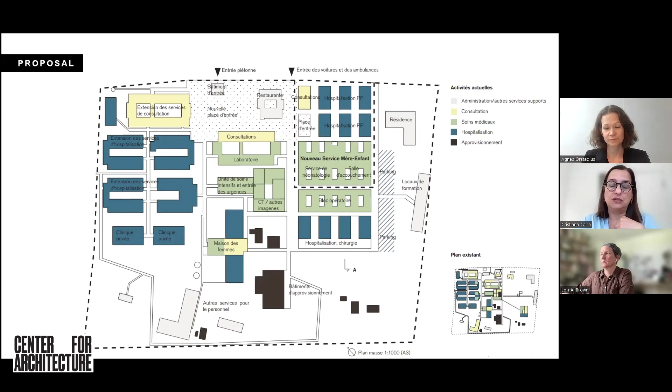And the more critical functions of the hospital are located in what you see in the green color in the center of the site, well connected to the emergency entrance.

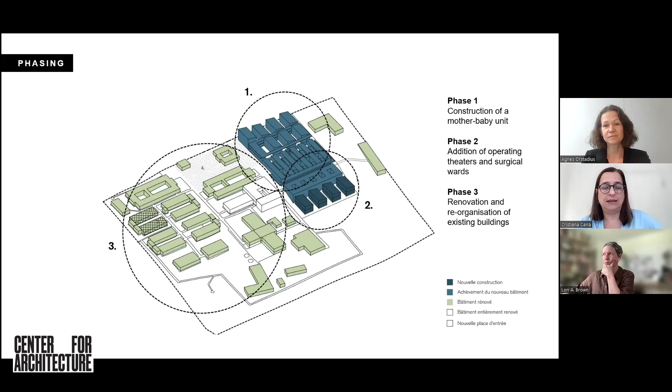The phasing is split into three parts. The first phase will be the development of the new mother and baby unit, which is number one. In the second step, a new operating theaters unit, located in the area marked number two. And as the third step, there will be the opportunity to renovate the existing buildings at the site.

So when it comes to the mother and baby unit, it is going to be the first phase of the development of the master plan, and the feasibility study and the concept design are based on a scientific, patient-centered, and holistic care philosophy.

The idea of Panzi is to develop a model for other maternity and neonatal care facilities in similar contexts, both in the Democratic Republic of Congo, Africa, and the rest of the world.

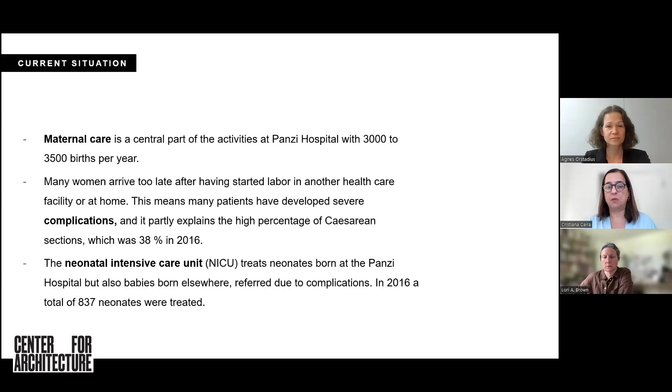The current situation is that maternal care and neonatal care are very important parts of Panzi Hospital's services, but many women arrive too late after having started labor in another facility, or unfortunately many at home. Some have developed severe complications, and the number of cesarean sections is extremely high. The same occurs for babies, many of whom are born elsewhere or at Panzi with complications and are then brought into Panzi Hospital.

The current situation is severe. There is a lack of space in the delivery unit and overcrowded postnatal wards. The delivery rooms are not appropriate for personal integrity and privacy. There is no opportunity for co-care of mother and baby, and no opportunity for the mother to stay close to their baby in the NICU department. It's very difficult for family members to stay close to mother and child.

The distances between the NICU, the delivery unit, and the operating theaters are big, which is quite difficult when it comes to patient safety. Sanitation is insufficient, and access to water and electricity is not secure. All of these factors create substandard work conditions for staff, and do not enable staff to work and deliver optimal care according to existing scientific evidence and the way Panzi Hospital actually wants to work with patients.

So what we did was work with evidence-based design as a process. I usually take this definition by Hamilton as most relevant for our work, since we worked with a process that relied on current best evidence from research and best practice, but was also very closely connected to the contextual needs of the users through design dialogues.

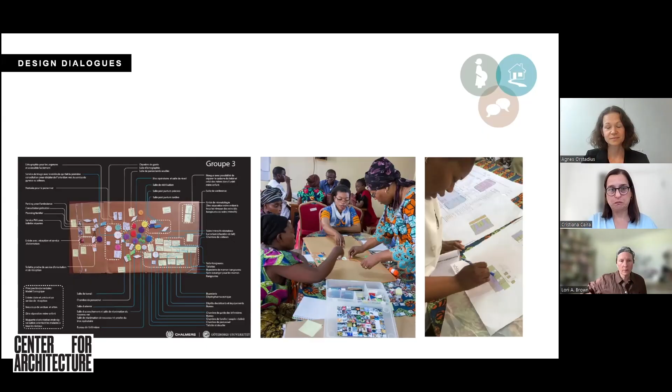The health promoting architecture principles are based on literature and scientific evidence, but we also had workshops on this specific topic to understand and quality-proof whether these principles are applicable and still coherent with the culture of the community and traditions.

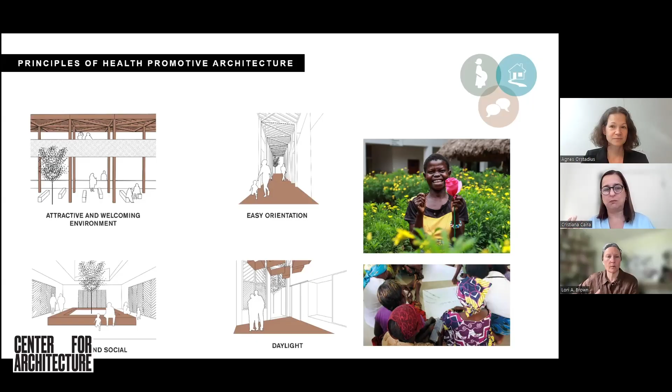We talked quite a lot about the attractivity of architecture and what it means: an attractive, welcoming hospital, easy orientation, the gradation between private and social spaces, and access to daylight.

We also worked with the local engineers and architects currently designing and working at Panzi to understand the quantity of materials, the access to building materials, and the building techniques to make a project that is really anchored to the site.

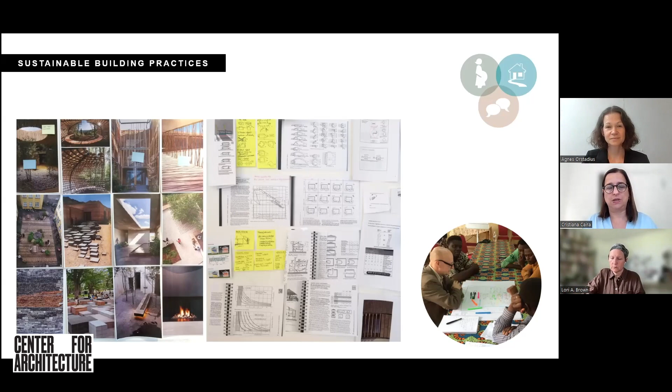Working on the core principles of the project, the main goals have been to reduce maternal and neonatal mortality and morbidity, creating optimal flows in short distances, the possibility to do cesarean sections in the delivery unit, and making the emergency flows reach directly to the delivery and neonatal unit.

To secure personal integrity and safety and work for zero separation of mother and child, we put the delivery unit and the NICU in direct proximity, also enabling co-care of mother and child and small wards with patient rooms for one to two mothers.

We also support or enable the continuous presence of a non-professional person, like the father, a family member, or a doula. This again impacted the brief significantly, creating space for companions in all patient rooms, family areas within the unit, and overnight space for relatives and supportive persons.

Working with a health promotive care environment, we aimed at creating a welcoming and attractive environment with access to daylight, views of nature, good indoor comfort in terms of temperature, ventilation and humidity control, noise-reducing finishes, easy wayfinding, and of course good, reliable technical systems.

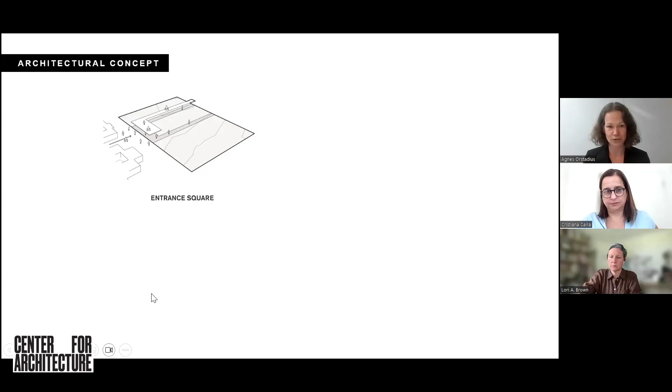And around these main streets, so to say, the program was organized so that all of the functions that needed these short distances and close connections were located on one entrance floor, with less urgent functions on the upper and the souterrain floors.

And within this structure, we worked with different sizes of atriums that were proportional to the heights of the buildings around them, to bring in greenery and daylight into this fairly compact structure.

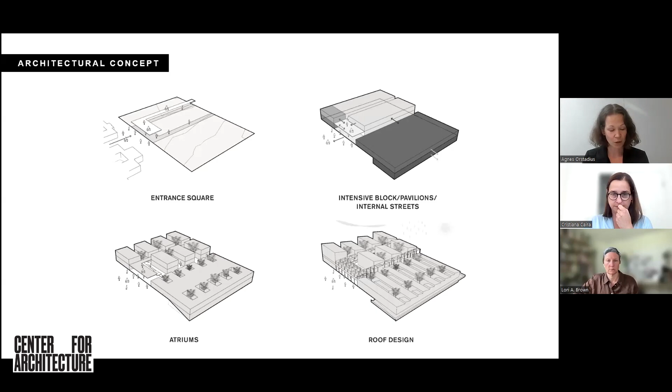We also worked with the roof shapes, optimizing them to the prevailing wind direction, enabling collection of rainwater and supporting natural ventilation.

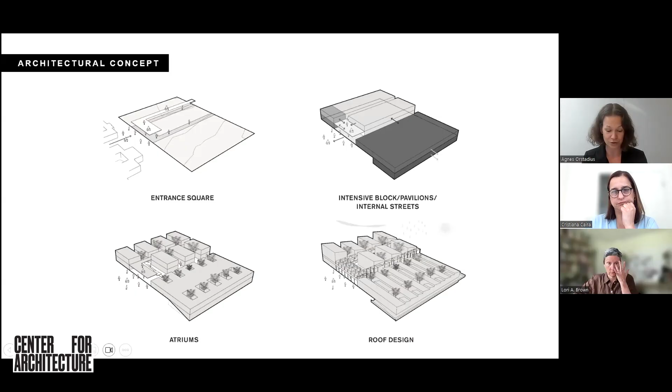And the public squares and the public streets were given this distinctive timber structure roof to further ease orientation throughout the structure.

So looking at the site plan, you can see the main entrance to the hospital towards the top of the plan, and the new mother and baby unit in the east.

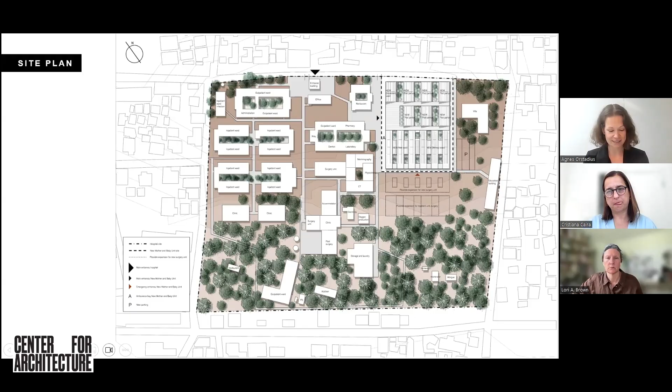This entrance square of the new mother and baby unit is oriented towards the main entrance. And you can see that we've densified the site rather than creating an expansive footprint and losing greenery.

Delving into the floor plans, if we start at the entrance floor, by the entrance arrow, number 1 is the large covered entrance square.

And the building closest to it, number 2, is the most outward facing part of the program. It's the consultation part, the antenatal outpatient department with consultation rooms, oriented towards the rest of the hospital and the entrance.

And leading off of this entrance square are the two streets, where the upper one leads through a series of postpartum pavilions in 2 floors, where healthy women and babies recuperate after the birth has taken place.

And the lower corridor leads to the neonatal unit on the left, and the delivery unit on the lower right.

And the neonatal unit contains cubicles for treating newborns, but crucially, it also contains this space for the mothers, which has been lacking, so that they can always stay close to their baby being treated.

And the delivery unit on the lower right contains 10 delivery rooms and also 2 operating theaters for cesarean sections, which, as Christiana mentioned, is a very common procedure.

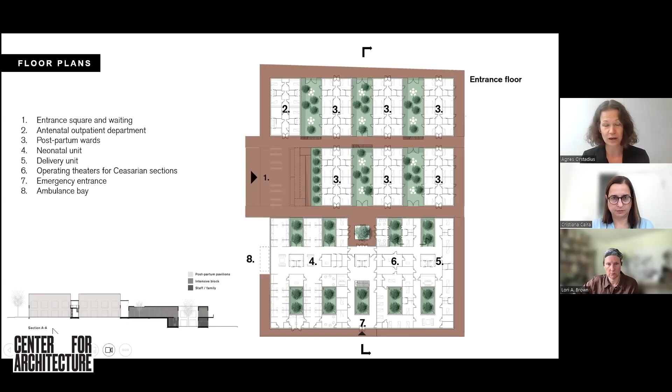And to the bottom, leading directly into these units, you have the emergency entrance, which is also easily reached from the ambulance bay on the left, coming off of the main entrance.

Moving away from the entrance floor, we see the upper levels of the postpartum pavilions. And located on this floor are also spacious classrooms, which we found a need for also for the rest of the hospital.

And above the entrance square, accessible by a ramp, we have a kitchen area for relatives and patients.

One crucial difference from designing this program in Scandinavia is the increase of presence from relatives of the patients, who accompany the patients on longer stays to support them and cook for them and so on, since no central cooking is provided at the hospital.

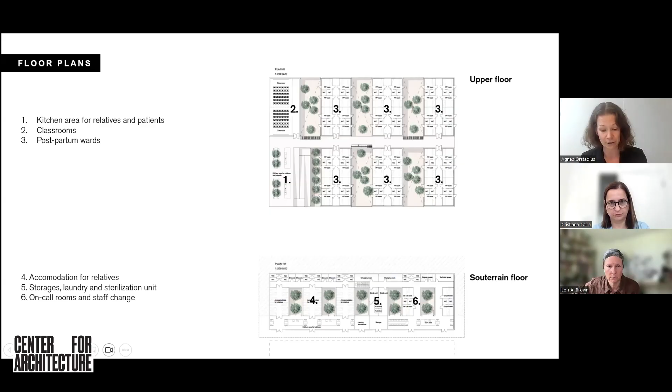Then on the floor below the entrance floor, we have placed accommodation for these relatives, support functions such as storage, laundry, and sterilization units, and also staff units.

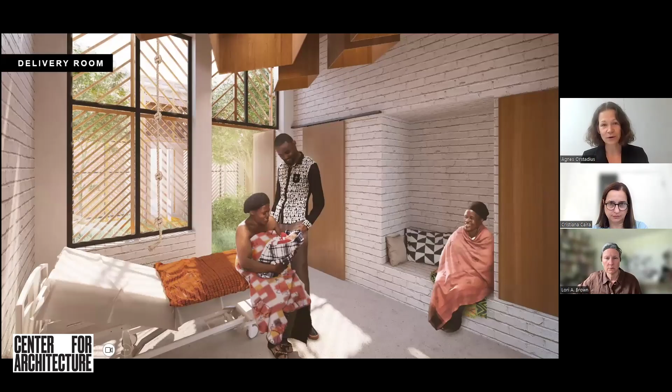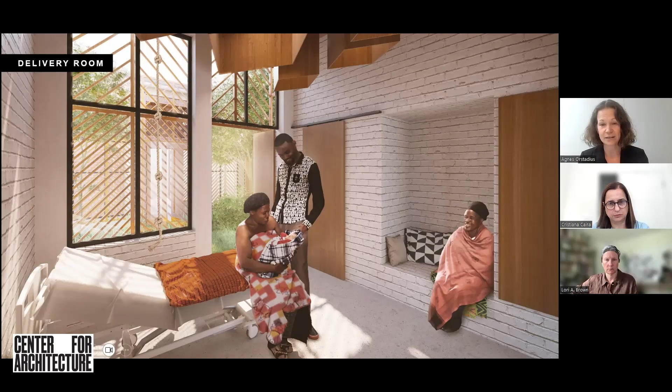This is an image from inside one of the delivery rooms, which faces onto an atrium, bringing in plenty of daylight and views of greenery, and which provides ample space for the mother, but also space for the supporting relative and the mother's companion, in a dedicated niche for sitting or sleeping. You can also see the door to the bathroom, which is shared between 2 delivery rooms.

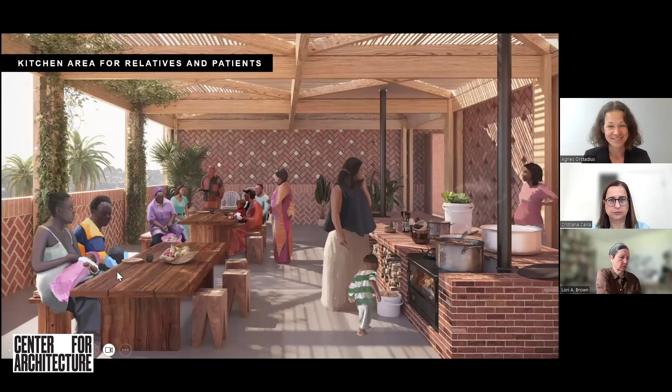And here you see the kitchen area for the relatives and patients above the entrance square, with the space and facilities for cooking and space to spend time with your family and your supporting relatives.

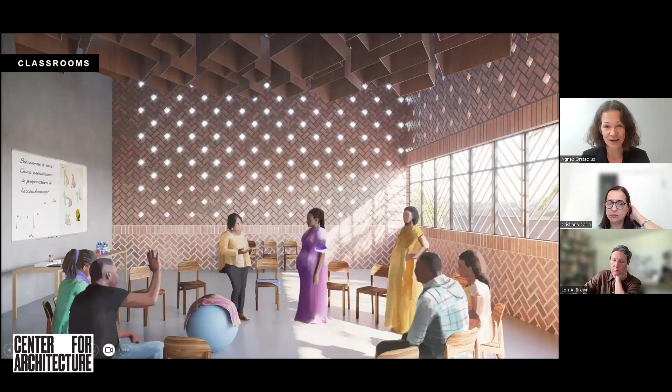And this is a view from inside one of the classrooms, where you have space for learning activities, both for the becoming mothers, but also for other needs within the hospital.

And the architectural intention of the project was to create a building that has a distinct identity in the materiality, but also one that breaks down the scale to be welcoming and approachable.

And there were several reasons for keeping the structure quite low, even though we wanted to densify the site and minimize the footprint. One is to let in as much natural ventilation and daylight as possible, and the other was to not rely too much on mechanical technology for vertical movement, such as elevators, so that all of the building would be accessible through ramps.

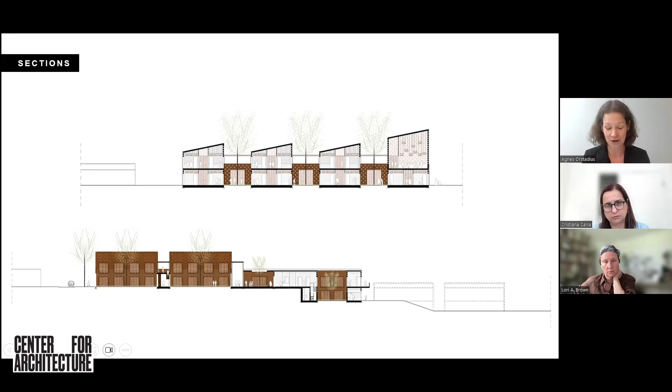And as a foundation for the design work, in choosing which architectural strategies to work with, we did a fairly thorough study of the local climate.

So this combination provided suitable conditions for using both the strategy of natural ventilation, but also passive solar heating with materials of high density that collect heat during the sun and then release it during the night.

And in addition to this climate research and mapping, we also tested our designs with simulations, tweaking the form to optimize for wind and orientation.

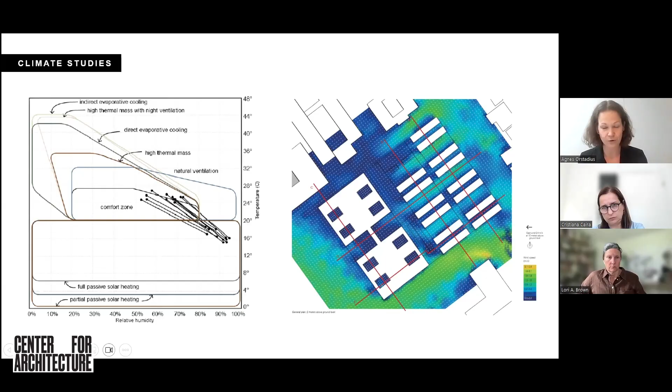So this is how these architectural strategies turned out in practice with these pitched roofs doing a lot of the work. As we mentioned, water can be a scarce resource, and so we devised a rain collecting system from these pitched roofs.

We also used heavier materials like brick to store heat during the day, and the pitched roof also helps ease natural ventilation through the building, creating a pressure difference on both sides of the building, which makes the dependency on mechanical ventilation much lower.

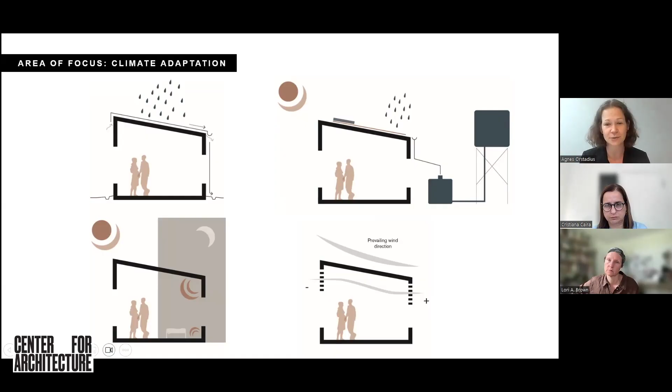We also did a lot of research on resource efficiency and tried to use local materials and local building techniques to the greatest extent possible. We used a lot of bricks, which are produced locally, and timber, which is also found nearby, so to speak.

We tried to minimize the use of concrete and steel because that has to be imported, and we also minimized the use of ceramic tile. So we let the material palette be very influenced by materials that are already commonly used in the region.

And we also worked a lot to future-proof the building. The entire floor plan is based on a very tested grid that has proved to be adaptable towards future needs, so that should you need to remodel the hospital in the future, hopefully the need for demolition is minimized, and the structure can be reused.

We also looked at earthquake resistance using local building techniques to stiffen the buildings and create even loads and a robust structure against earthquakes.

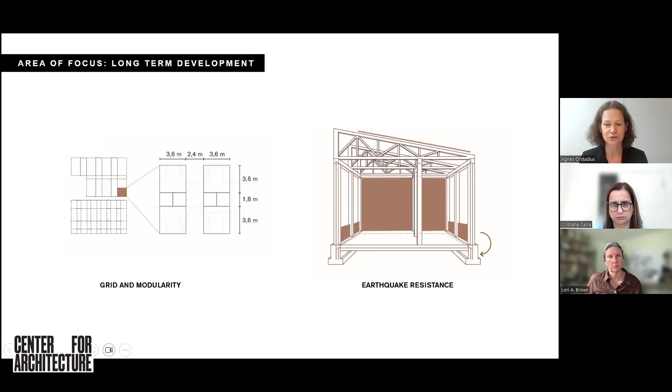And although it was a feasibility study, we wanted to make sure that it was actually practically feasible to build these structures. So we went quite deeply into designing the construction of the building and looked at the local construction methods, reusing a lot of the methods that have been used to construct the existing hospitals, but updating them according to our findings in terms of what worked best for the climate and what could make the hospital as robust and as technologically independent as possible.

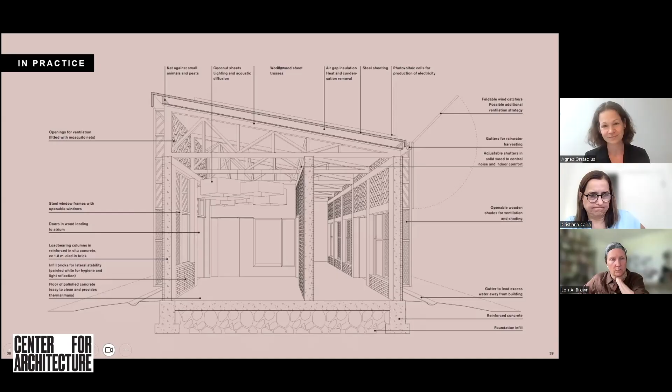So when this part of the feasibility study was concluded, just one year after it became official, we were actually waiting for Dr. Mukwege to connect to a Zoom meeting to discuss some part of the design of the building, and then we realized that he had won the Nobel Prize the same day.

This has been, of course, an amazing recognition for Panzi Hospital for the work that they are doing for women and women's rights in the region. He has also taken the opportunity to talk in many different global conferences and networks on this topic, because it is unfortunately not only a topic for Congo.

What happened afterwards is that the project has been receiving a lot of international attention. It has been featured in many different magazines and architectural publications. It also won prizes, such as the World Architecture Festival in 2018, and we have published a few reports that are available on our webpage to be downloaded.

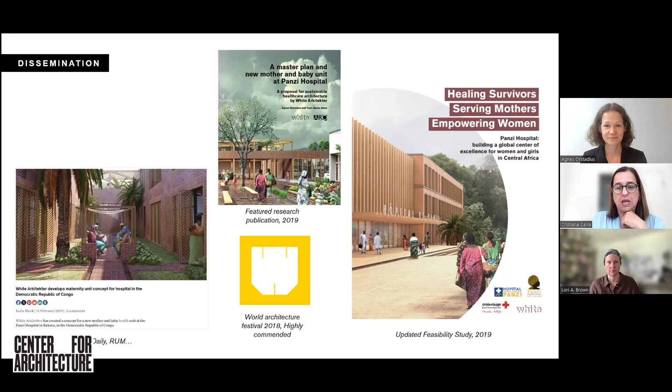The most recent dissemination was last year, in 2023, last summer in July. There was the Union of International Architects Congress in Copenhagen. On this occasion, most countries had their exhibition, and they showcased interesting projects from their different countries. The National Association of Architects of Congo had the project featured in their exhibition without actually talking to us at White.

So we were there, and all of a sudden, walking in the exhibition, we found our project featured by the National Association of Architects. They had featured just a couple of projects in modern or contemporary architecture from Congo, which for us means a lot, because it really means that this project has been an inspiration for new generations of architects in Congo.

I would like to conclude with this quote, because it was the quote they chose for the exhibition: that White designed the future Panzi Hospital with the mission of enabling the reintegration of women victims of rape in society through the art of sustainable architecture.

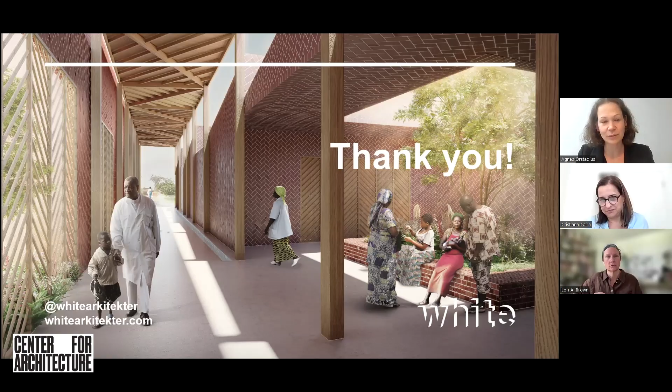I don't know, Agnes, if you have anything you'd like to add to that. Absolutely. I would agree that every project is an opportunity for a learning experience, but it's not often that learning becomes so explicit as it does here, where you have practitioners from very different fields, different professions and cultural contexts, speaking different languages. You have to be very aware of your own communication and methods, and be able to explain them well. That has been incredibly valuable in making us aware of how we work, how we present our design in a convincing way, and so on. So I think it's really brought light onto all of our practice after we did this project.

Thank you. So I did spend some time looking at the publication you made that you had recommended. And one thing that really struck me, because I've been thinking a lot, especially in my teaching, about UN Sustainable Development Goals, was something mentioned in your publication about how this project is contributing to the change from a philanthropic model of care to one of a more empowered development model. Can you speak a little bit more about that? Because I think that's a really important thing for all of us to be thinking about in terms of who and why we serve different communities in ways that can extend and create more resiliency in the future of what is being built and made.

Yeah, so the first impression when we started this project was that next to the existing pavilions that had been built from the beginning in 1999, there had been a few additions, a few new buildings. They had the names of the donors on them, and these buildings are, for me, a physical representation or symbol of this philanthropic way of supporting, unfortunately, many different countries or communities. Buildings that are placed to manifest philanthropy, but that were partly not used because they are placed in the wrong place, too big or too small, or provided with technologies that require a lot of electricity or IT that doesn't exist on site. There was very advanced dentistry equipment, and cots for premature babies, just standing in corners, not used because there isn't enough electricity on site.